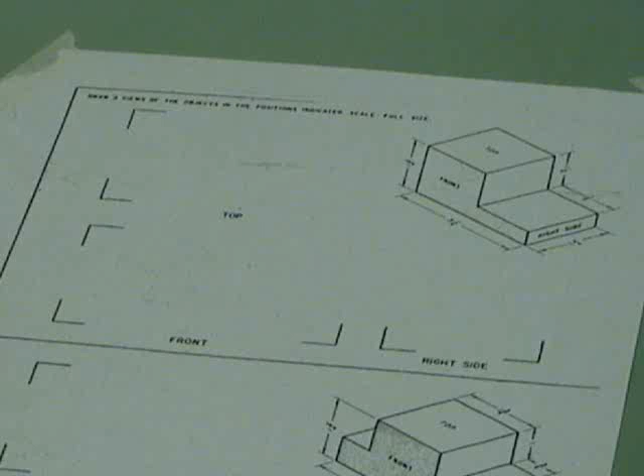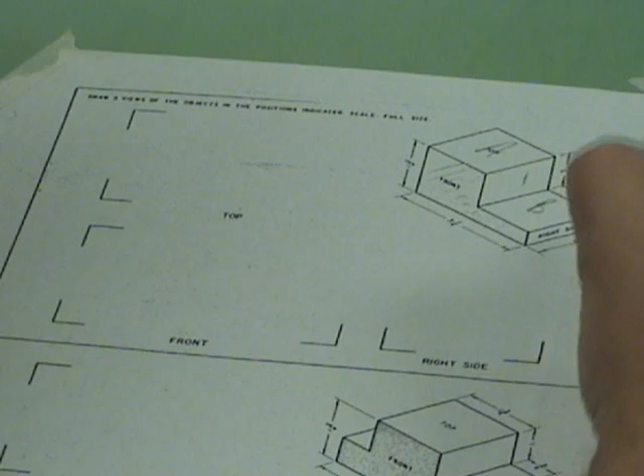Alright, we're looking at sheet D3 and we're trying to figure out which views to always draw first. When we look at this one from the front view, we see this big fat L on its side. We look down at it, we see two rectangles A and B, and when we look at it from the right side, we see two rectangles 1 and 2.

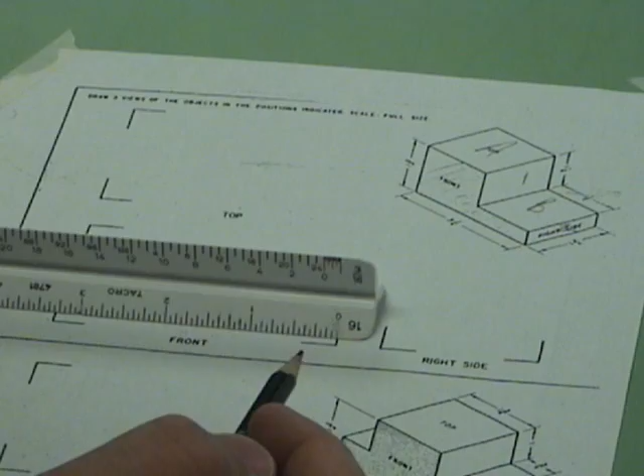For this particular drawing, we've got these brackets on the sheets. These brackets represent the actual size of the part. It says on this drawing that the part is 3 1/4 wide. If I measure 3 1/4, it'll be pretty much right on with those brackets. It says the part is 1 3/4 tall, and if I measure that, it's pretty much right on at 1 3/4.

So the first thing I'm going to do is put those two lines in there to draw my front view. You draw the front view first 98% of the time because it has the most features on it. I'm going to try to get this L looking piece. I've got to figure out how tall this edge is right here.

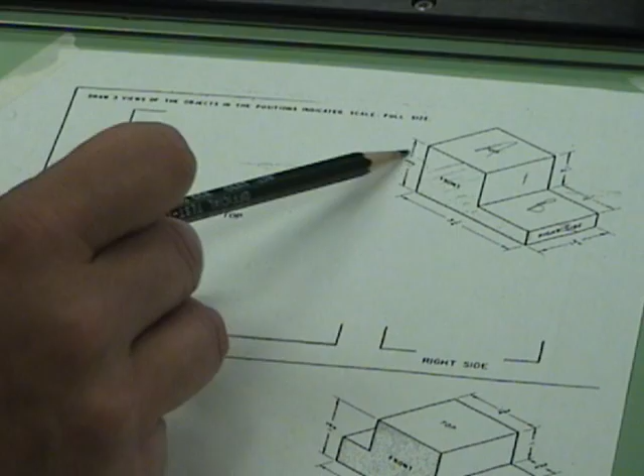It tells me the overall size of the part is 1 3/4. It tells me that measuring downwise it's 1 1/4 left over. So I've got to subtract two fractions. 1 3/4 minus 1 1/4 gives me 2/4, and 2/4 is a half. So that tells me I've got to measure up 1/2 of an inch here.

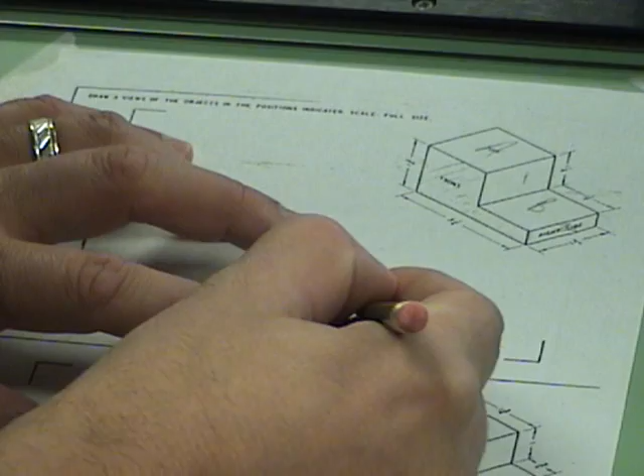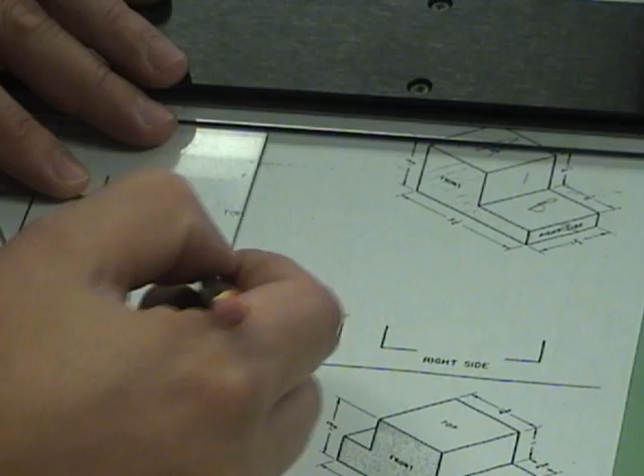It also tells me that I can come over 1 1/2, so I will measure that 1 1/2 mark over. Now at this point, I don't have to even really know any of the other measurements, because I can just transfer those things up. So I measured over the 1 1/2, I'll run that one up, I'm going to take this bracket, measure it over, maybe erase out a little bit here, and there's my front view for that top one.

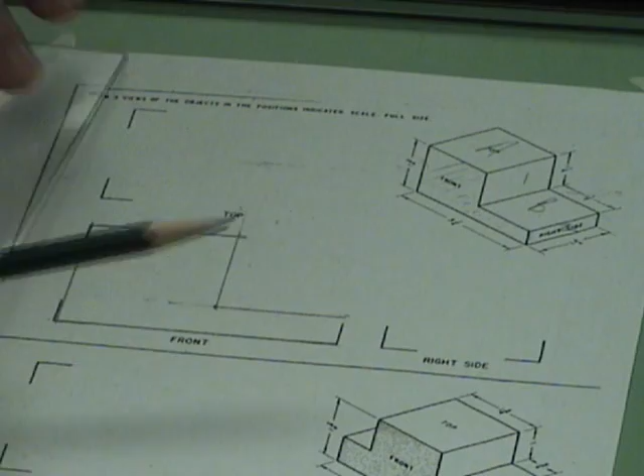Now with that stated, I've got the front view done. I don't have to measure anything for the top view and the right side view to be completed. We're going to transfer all the features. I'm going to transfer every single up and down line. This up and down line, I'll transfer it up. This up and down line, I'll transfer it up. And then I'm going to go ahead and use the brackets that are on there.

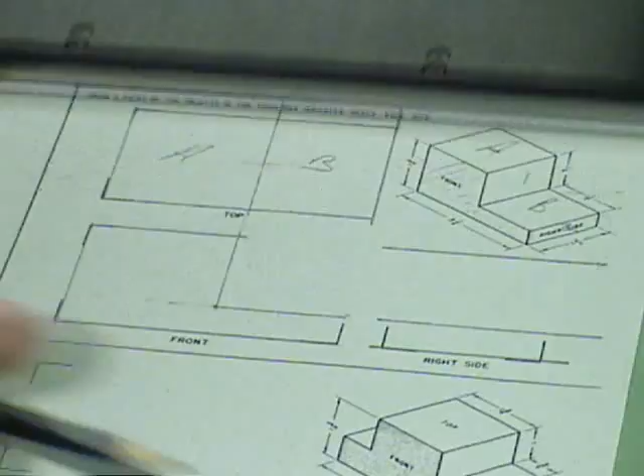Bring them over, and right there is A and B, top view done. I'm going to do the same thing for the right side view. I'm going to transfer over every horizontal line, and go ahead and use the brackets. And there's 1 and there's 2, and that drawing is done. Notice that all the features transferred up, everything lines up perfectly, measuring with my ruler, etc.

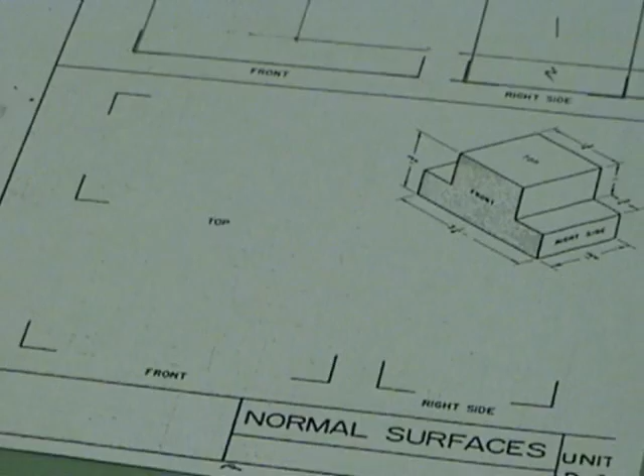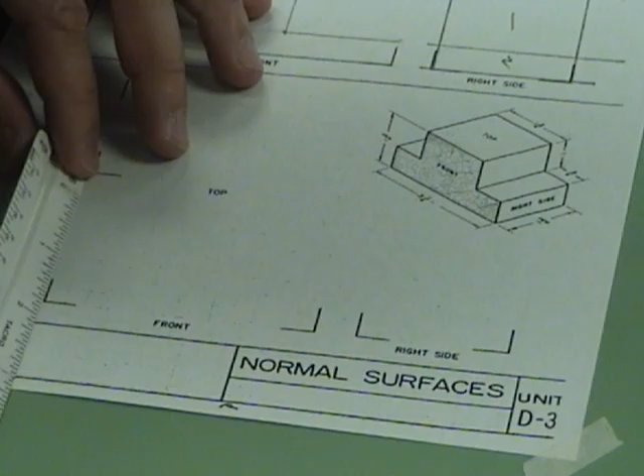Now when we go down to the second one over here, pretty much the same concept. We're going to draw the front view first. So what we're looking at is drawing this little hat shape, and the hat shape is 3 1/4. It tells us the overall size of the part is 1 3/4 tall. It didn't give me a bracket here, so I'm actually going to have to measure that. So I'm going to measure up 1 3/4, come up 1 3/4, and make my 3 1/4 mark over.

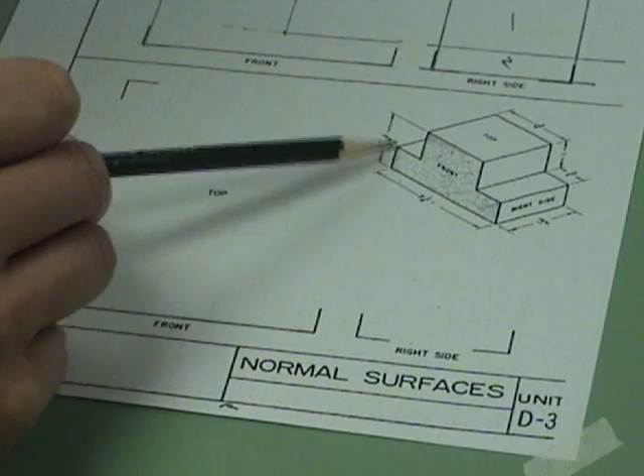Now I need to be able to figure out how to get up, over, and up and over. So I need to know how tall this part is right here. Well, if the overall size of the part is 1 3/4, and how far down it comes is 1 inch, 1 3/4 minus 1 inch leaves it. This piece is 3/4. This piece is 3/4. It tells it to come in 3/4 as well. So actually I probably shouldn't even have drawn that line up. I'm going to measure up 3/4 of an inch

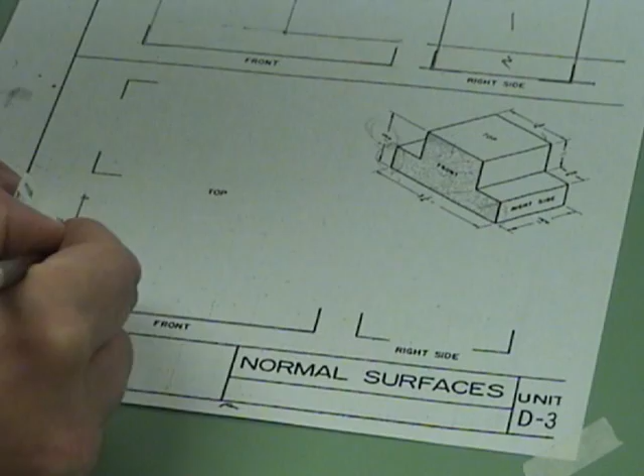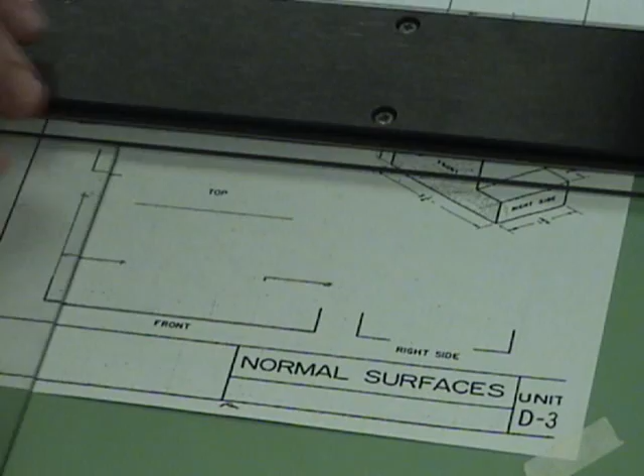on both sides. I'm going to measure in 3/4 of an inch on both sides. Actually, that line doesn't hurt. Bring that across, bring this one over. So now I've got my hat, and I would have to eventually erase that out. So there's my top hat.

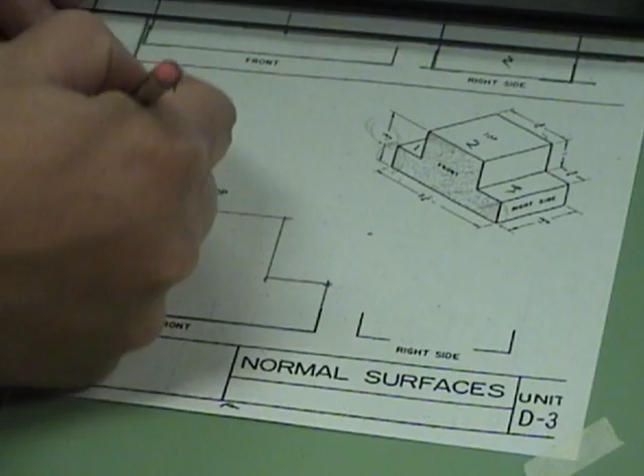Now when I look down at this piece, I see 1, 2, 3 rectangles. So from my front view, I'm going to transfer up all the up and down measurements. Everything, any line that's up and down, I'm just transferring straight up. And in this example, I can use the brackets. And I've got 1, 2, 3 rectangles. There's your top view complete.

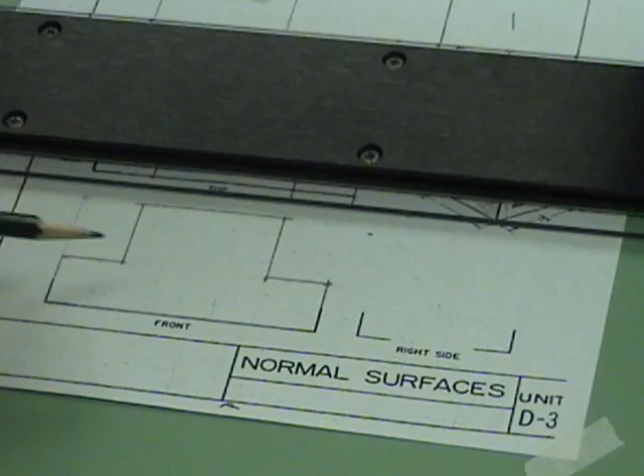Now to get this right side view, I'm going to transfer across all the horizontal lines, use the brackets to shoot them up. And from this view I see A and B. Well, now there's A and there's B. D3 is now completed.